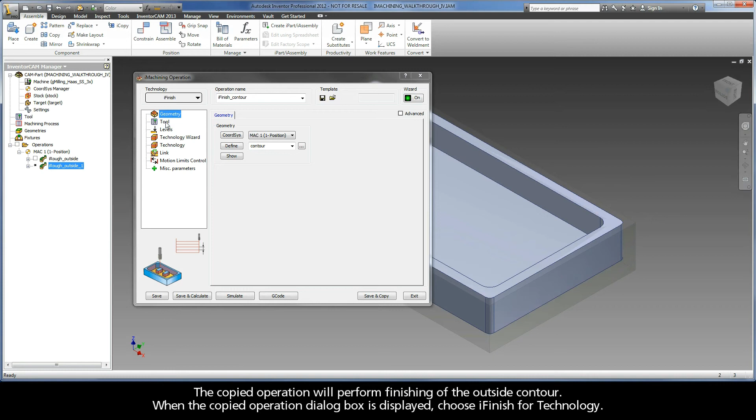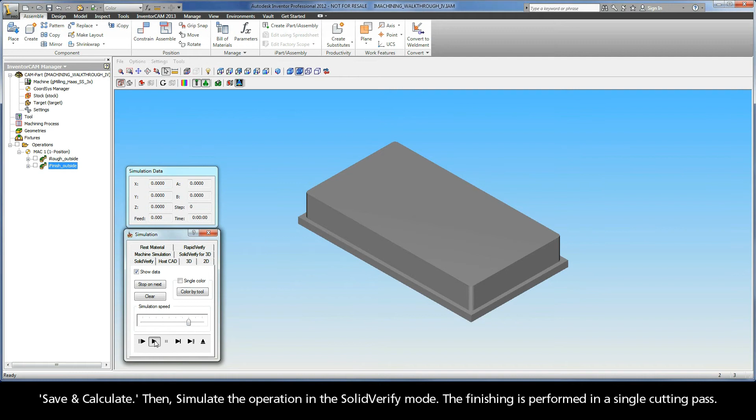Now, let's switch to the Technology branch. In the iRest Data tab, note that the previous iRough outside operation appears in the parent operation combo box, which means that the technological parameters of the current operation are inherited from the previous parent operation. Save and calculate, then simulate the operation in the SolidVerify mode. The finishing is performed in a single cutting pass.

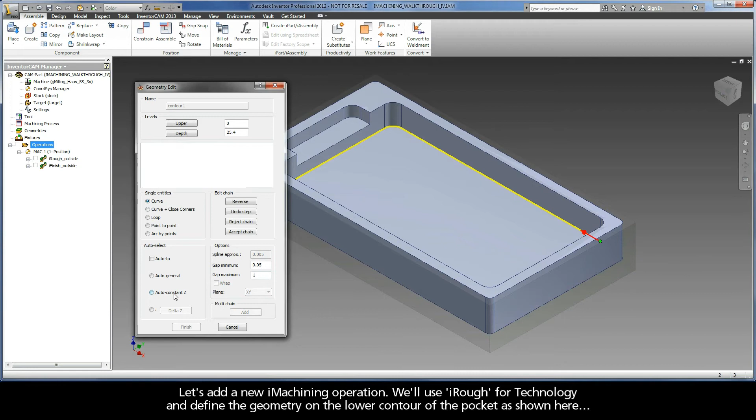Next, we will define the rough and finish machining of the center pocket. Let's add a new iMachining operation. We'll use iRough for Technology and define the geometry on the lower contour of the pocket as shown here. Pick the bottom face of the pocket for the machining depth. We will select the same end mill tool defined in the previous operation, and we'll also use the default Technology Wizard settings.

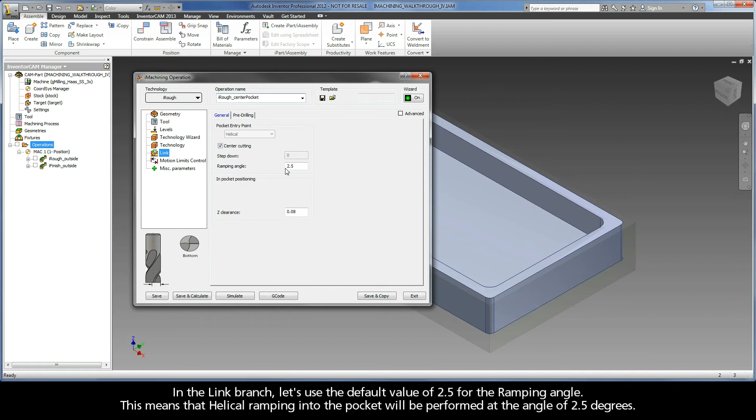In the link branch, let's use the default value of 2.5 for the ramping angle. This means that the helical ramping into the pocket will be performed at the angle of 2.5 degrees. Save and calculate the operation. Let's simulate it in the SolidVerify mode. We see that the tool performs the helical entry and then the pocket roughing toolpath.

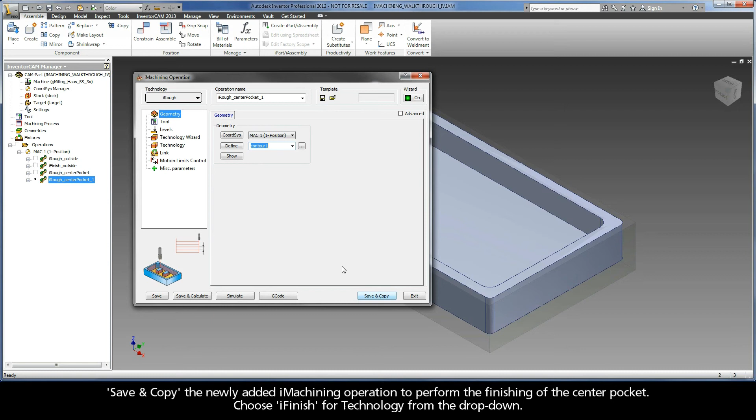Save and copy the newly added iMachining operation to perform the finishing of the center pocket. Choose iFinish for Technology from the drop-down. Under the iRest Data tab in the Technology branch, the previous iRough center pocket operation appears as the parent operation. Save and calculate the operation, then let's simulate it in the SolidVerify mode. The rest material is cleared from the pocket corners before the final finishing pass is performed.

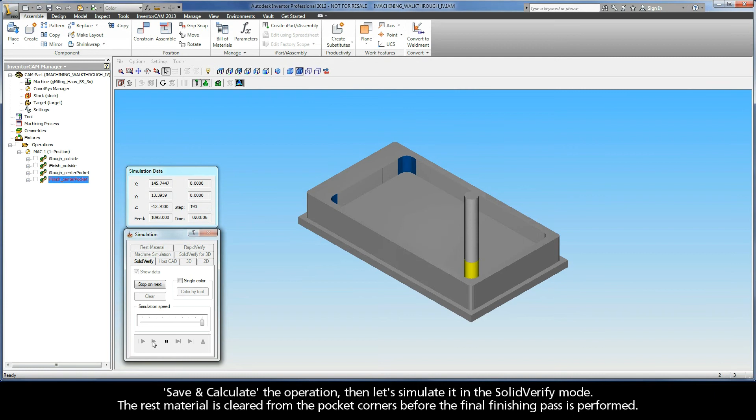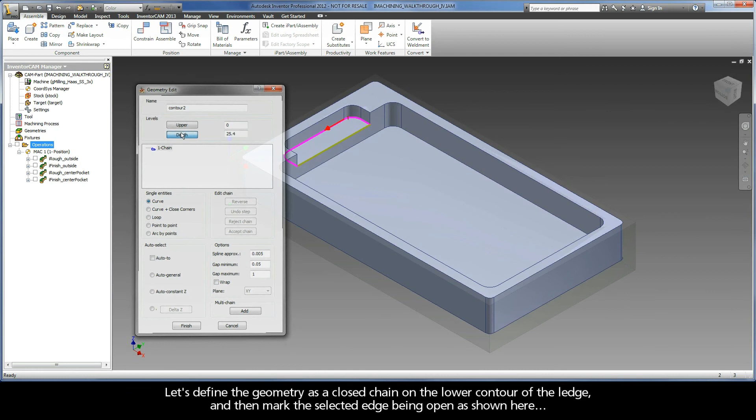Lastly, let's define the rough and finish machining of the pocket ledge. We will add a new iMachining operation and again use the default iRough for Technology. Let's define the geometry as a closed chain on the lower contour of the ledge, and then mark the selected edge as being open, as shown here. Pick the bottom face of the ledge for the machining depth definition. We will use the same end mill tool defined in the previous operations, and we'll also use the default Technology Wizard settings just as before.

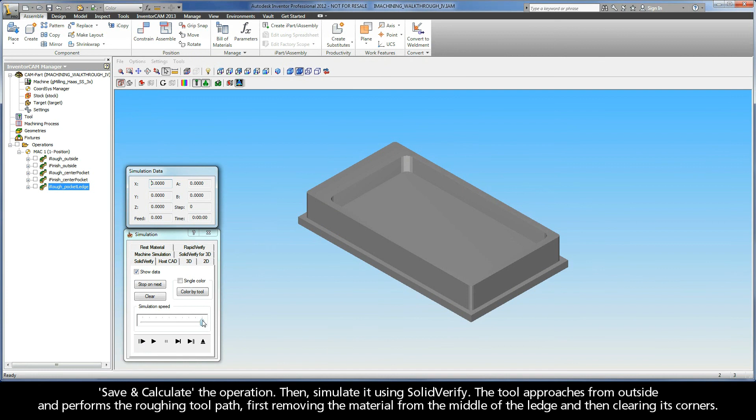Save and calculate the operation, then simulate it using Solid Verify. The tool approaches from the outside and performs the roughing toolpath, first removing the material from the middle of the ledge and then clearing its corners.

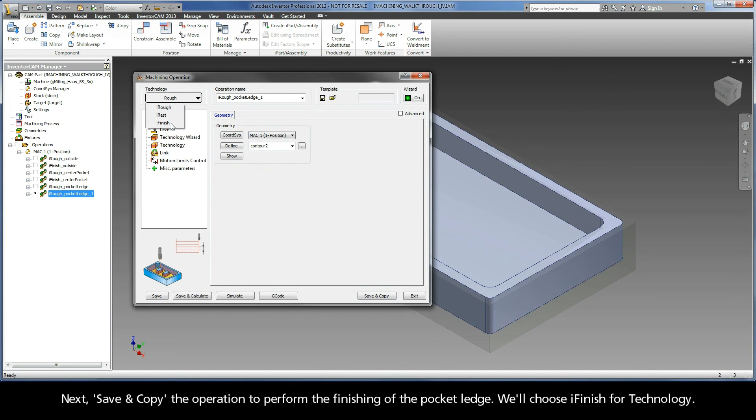Next, save and copy the operation to perform the finishing of the pocket ledge. We'll choose iFinish for Technology. Save and calculate the operation, then click Simulate. Again, we'll run the simulation using Solid Verify. We can see that the finishing of the pocket ledge is performed in a single pass.

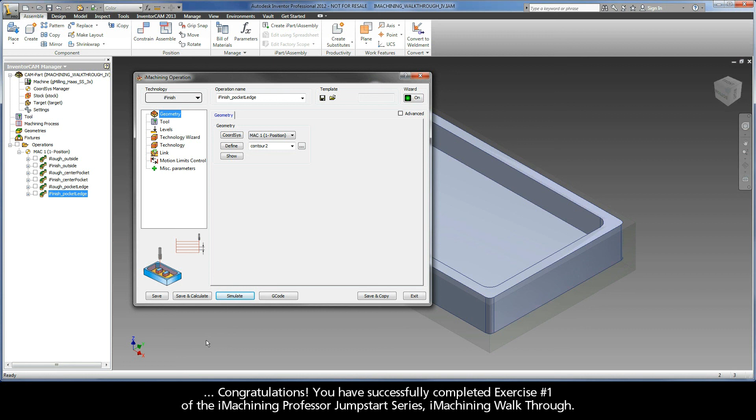Congratulations! You have successfully completed Exercise 1 of the iMachining Professor Jumpstart series, iMachining Walkthrough. We hope you found this step-by-step guide on the definition process of InventorCAM's iMachining technology to be very helpful.